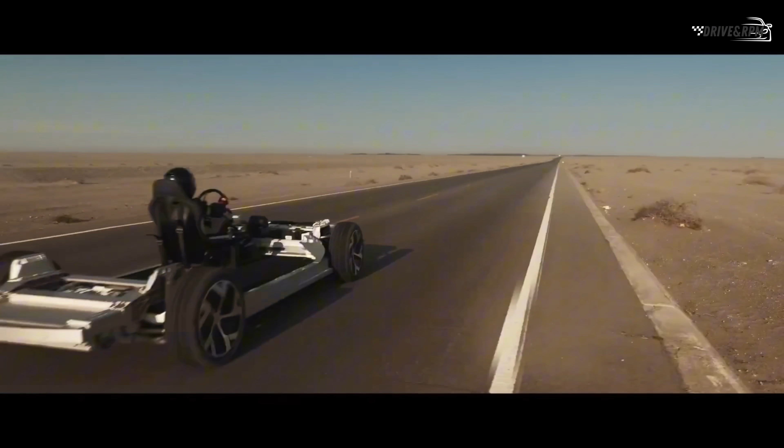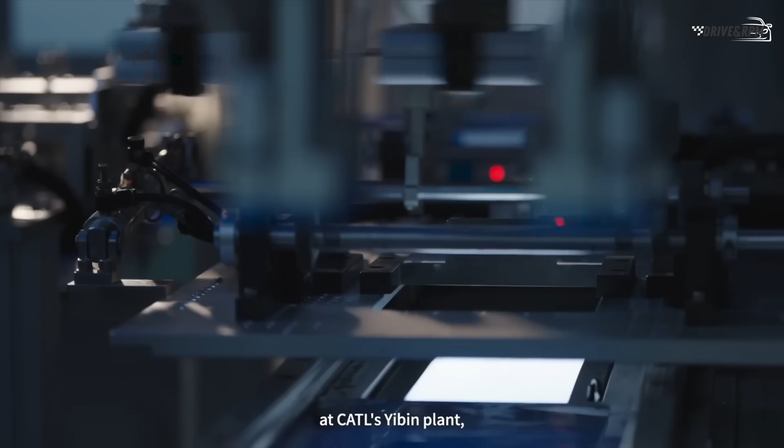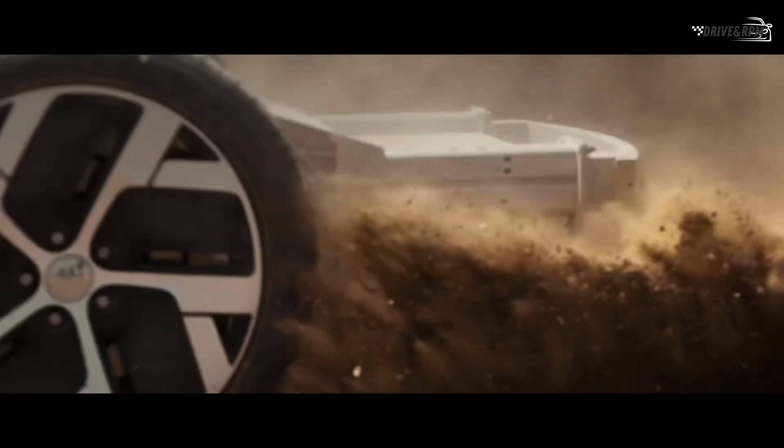If you have been browsing the automotive internet recently, you have probably been targeted by a headline that sounds like absolute science fiction. Automotive channels are screaming that CATL has allegedly built a miraculous battery with a staggering energy density of 12,000 watt-hours per kilogram, promising an unconditional 2,000-mile or 3,200-kilometer range on a single charge. They are telling you that gasoline is officially dead tomorrow.

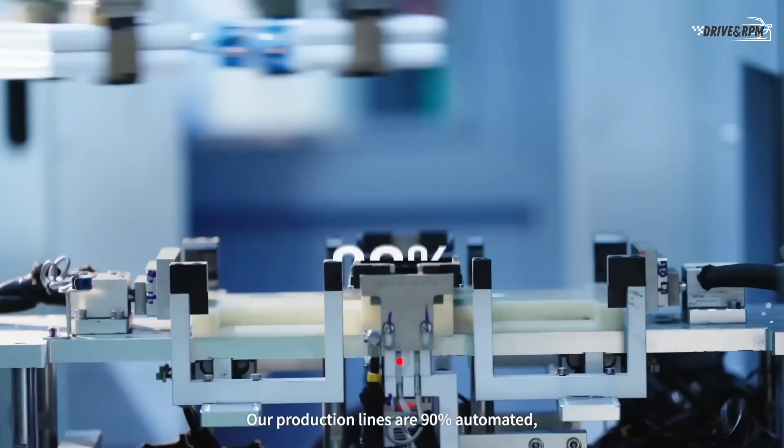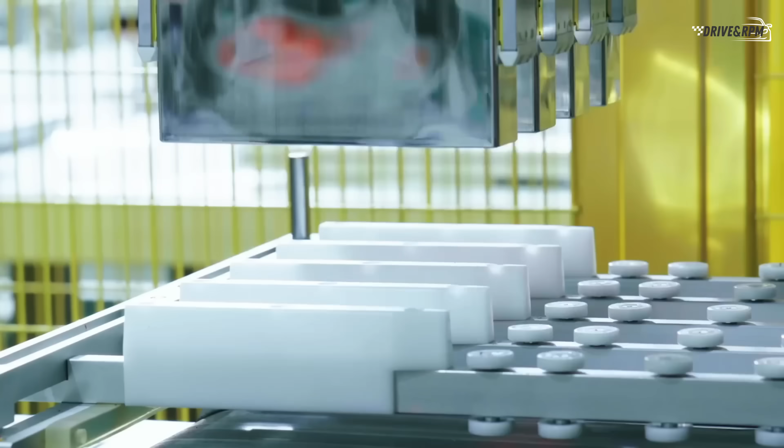But let's pause and look at the real reason why millions of drivers are clicking on those videos. It is not because people care about the complex mathematics of energy density. They click because of a deeply human emotion: exhaustion. As drivers, we are exhausted from range anxiety. We are tired of loading our families into the car for a winter holiday, only to watch our driving range instantly plummet by 30% just because we turned on the cabin heater. We are frustrated by broken highway chargers, freezing winter temperatures that paralyze battery chemistry, and the constant mental mathematics required just to take a simple cross-country trip.

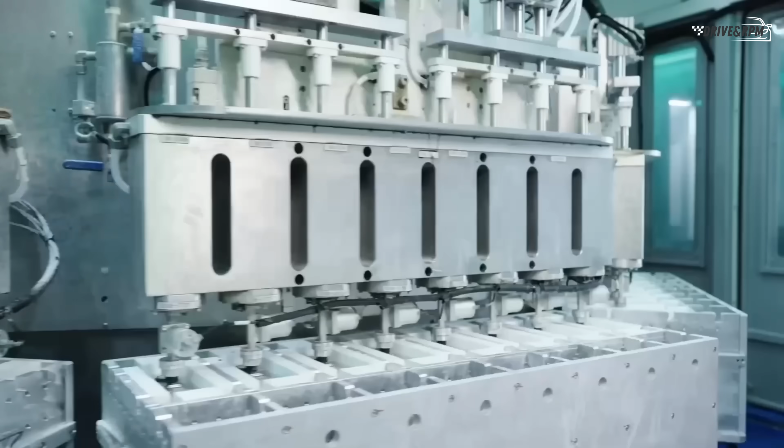The mainstream media knows you are craving true automotive freedom, so they package these numbers and sell you a clickbait dream. So, what actually happened behind closed doors?

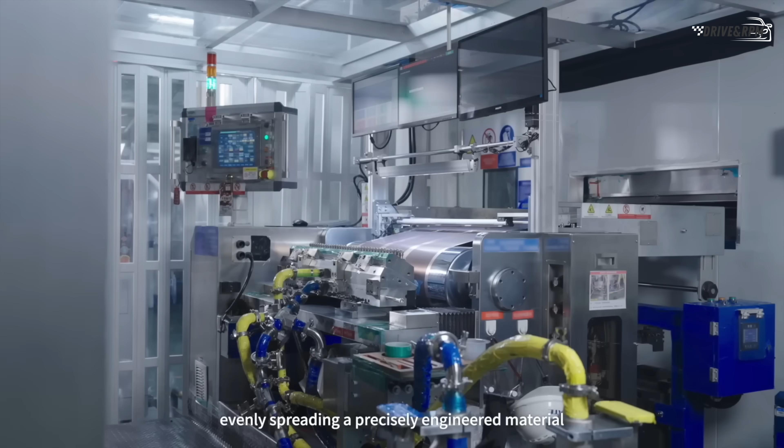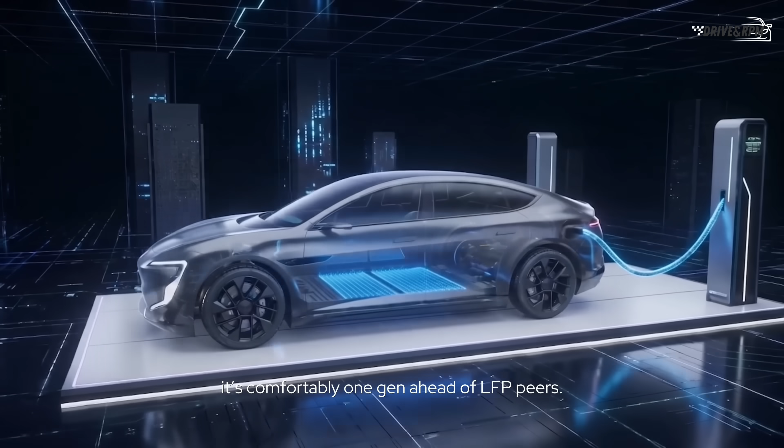A few days ago, at a major equipment and power forum, CATL's chief scientist, Wu Kai, stepped onto the stage and made a massive, industry-shaking announcement. He officially declared that CATL is weaponizing its vast research and development ecosystem to perfect lithium-air battery technology.

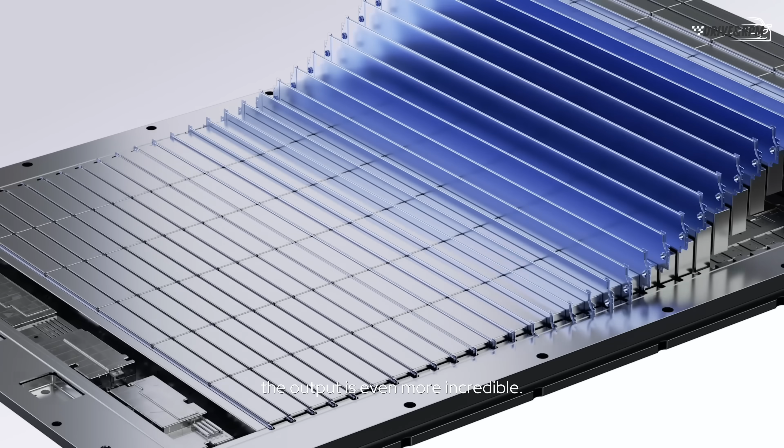But here is the absolute truth the internet intentionally missed. 12,000 watt-hours per kilogram is not the specification of a battery that CATL just rolled off a production line. It is the absolute theoretical limit allowed by the fundamental laws of physics. It is the ultimate scientific benchmark.

Today, we are going to strip away the sensationalist hype, expose the fake news, and look at the genuine forensic engineering behind what will become the ultimate cure for range anxiety: the breathable battery.

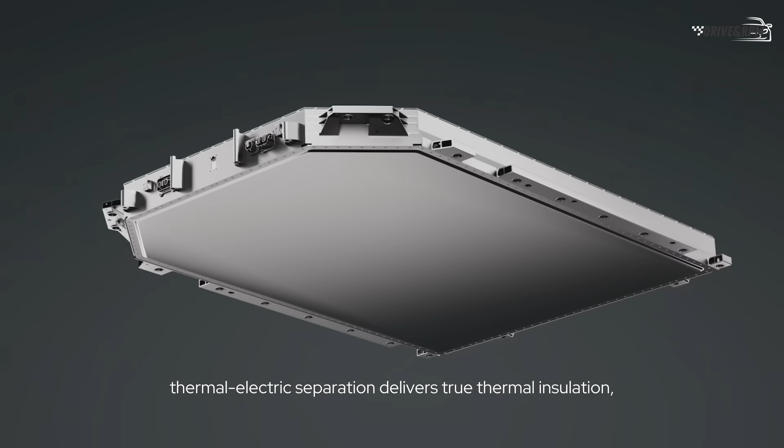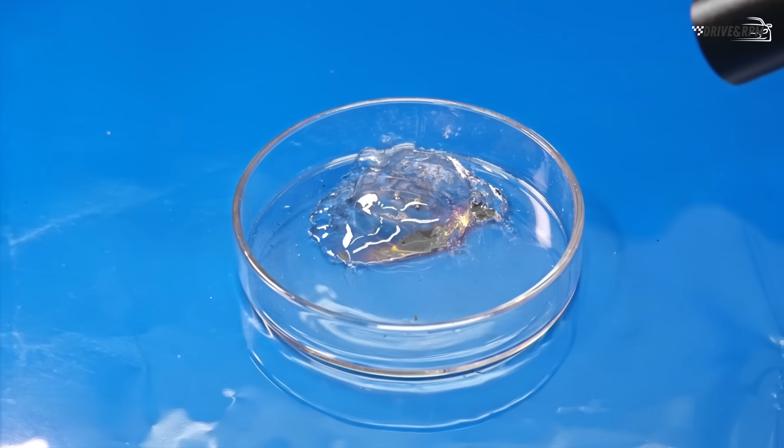To truly understand why the global engineering community is losing sleep over this announcement, we have to look at the massive physical compromise we are forcing drivers to accept today. Right now, the lithium-ion or LFP packs inside our modern cars are incredibly heavy, dense, and rigid. Why? Because they operate as self-contained chemical prisons.

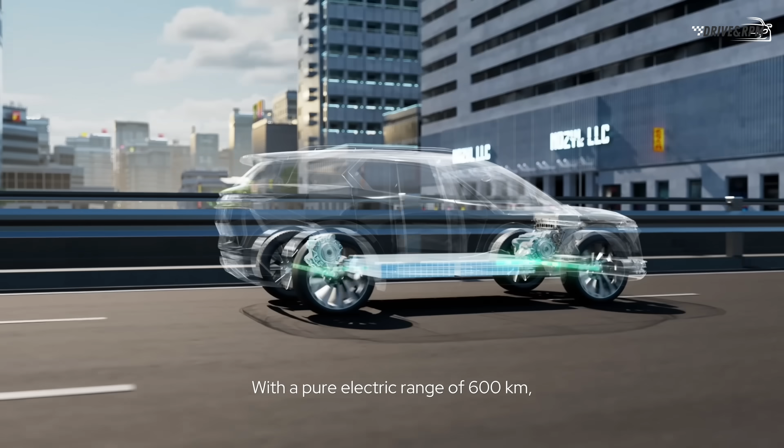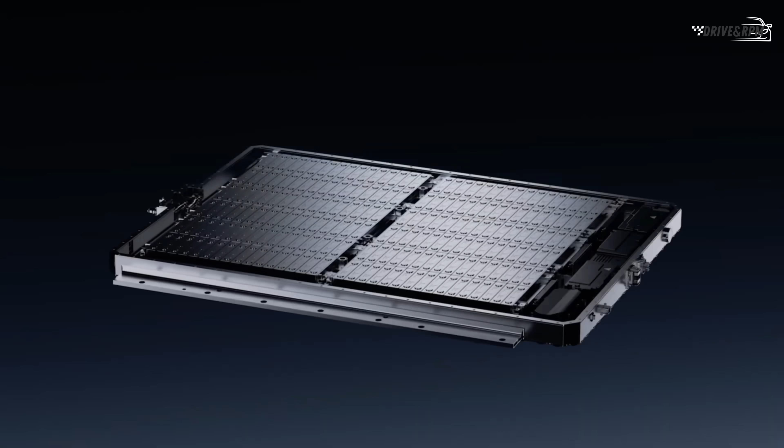They must carry every single active material required for the chemical reaction sealed inside a heavy, armored casing. Specifically, they use incredibly heavy metal cathodes packed with materials like nickel, manganese, or cobalt. When you drive a modern electric SUV, you are essentially driving a mobile bank vault. You are dragging around hundreds of kilograms of dead weight.

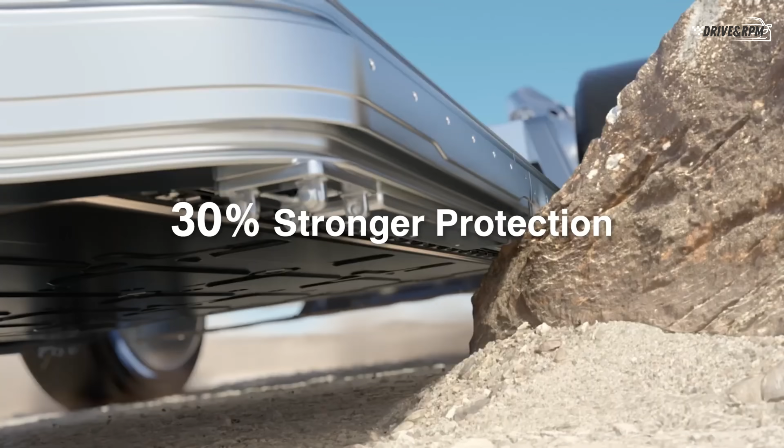This doesn't just hurt the handling and ruin the driving emotion. It destroys efficiency, and it severely accelerates wear and tear. A heavy EV chews through expensive tires at an alarming rate because the rubber is fighting a constant, losing battle against sheer mass. Lithium-air technology completely rewrites the rules of physics, and it does so by mimicking something beautifully organic: breathing.

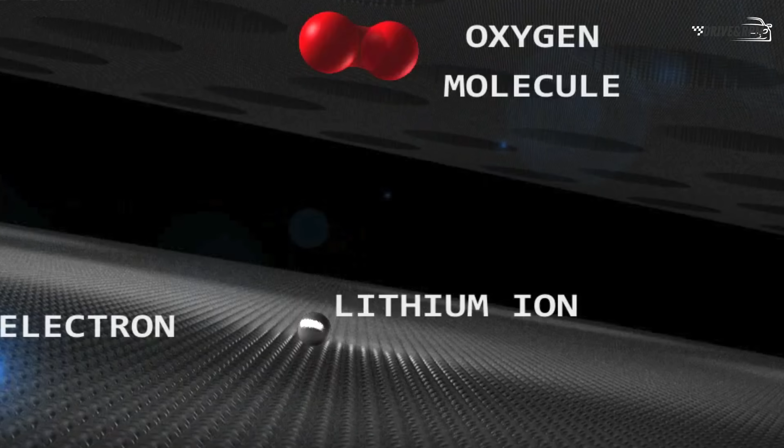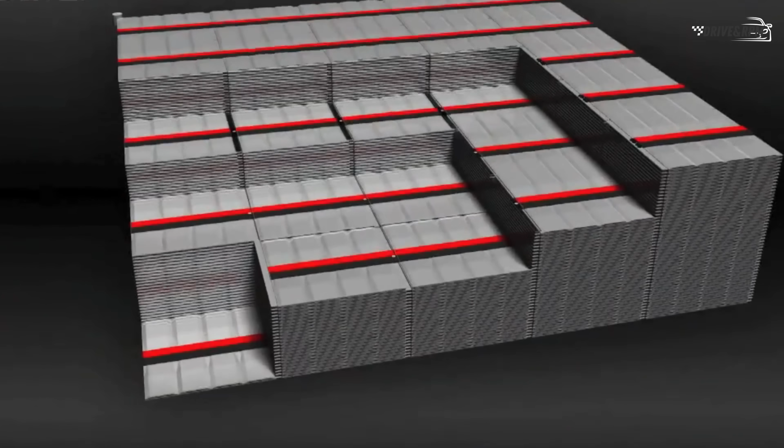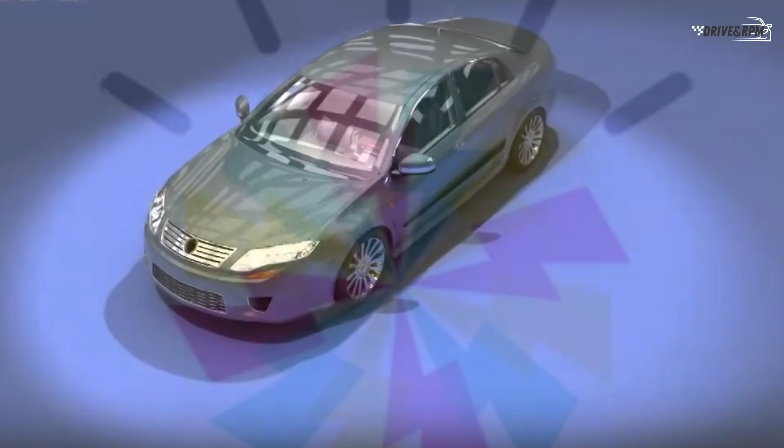It is nicknamed the breathable battery because of its open, porous structure. Instead of carrying a heavy internal cathode filled with dead, expensive metals, a lithium-air battery relies on the environment. When you put your foot on the accelerator, the car literally inhales ambient oxygen from the outside air. This oxygen flows through a highly advanced microscopic membrane and reacts directly with a lithium metal anode to generate pure electricity.

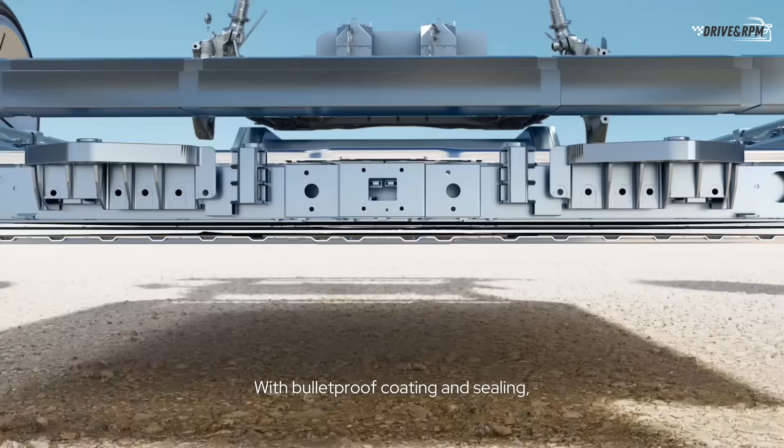When you plug the vehicle in to recharge, the chemical process reverses, and the oxygen is simply exhaled back out into the atmosphere. By utilizing the oxygen in the air around us, engineers can eliminate the heaviest components of a traditional battery pack entirely.

It brings back the fundamental brilliance of a traditional internal combustion engine. An engine doesn't carry a heavy tank of oxygen in the boot. It breathes the atmosphere, and soon, your electric car will do exactly the same.

So, if the physics of a breathing car are so perfect, why is this announcement only happening now? Traditional legacy automakers in the West desperately want you to believe this is just a distant laboratory experiment. They want you to think this is a wild conspiracy theory that won't affect the market for another 20 or 30 years. They push this narrative because they are absolutely terrified of how fast the landscape is changing beneath their feet.

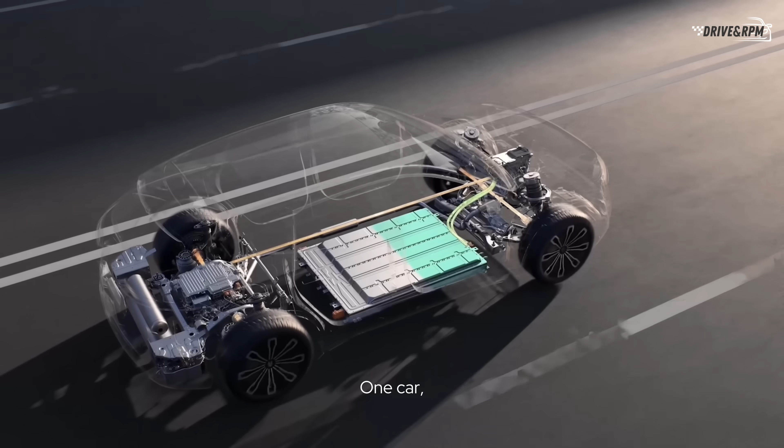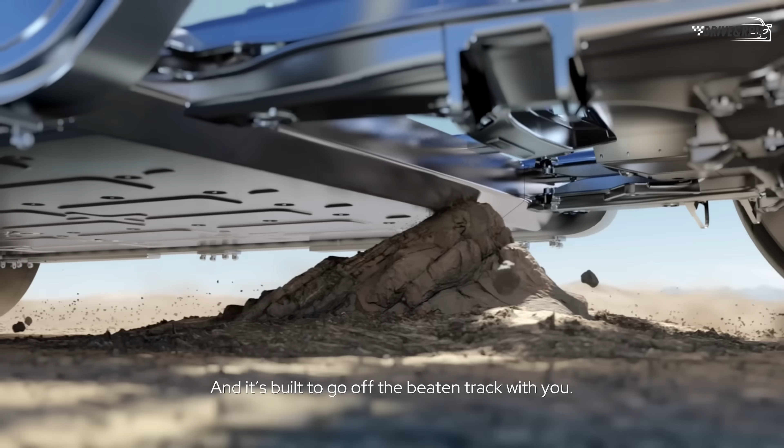While the theoretical limit of the chemistry is 12,000 watt-hours per kilogram, which remarkably matches the exact energy density of crude petrol, working, highly advanced prototypes are already breaking records at around 1,200 watt-hours per kilogram in testing environments. Let's put that into perspective for the everyday driver.

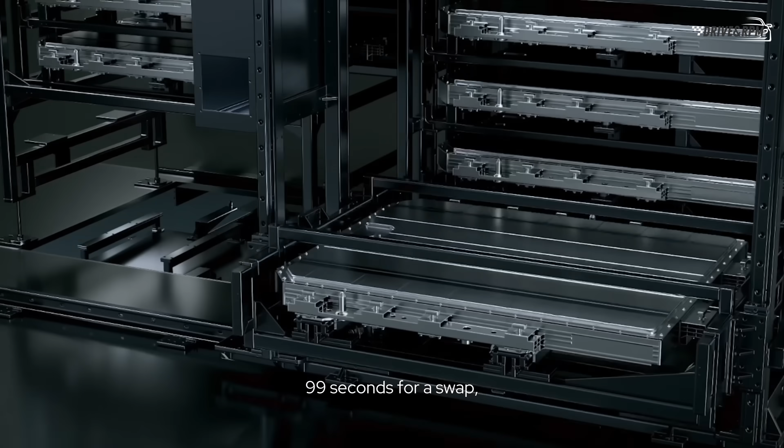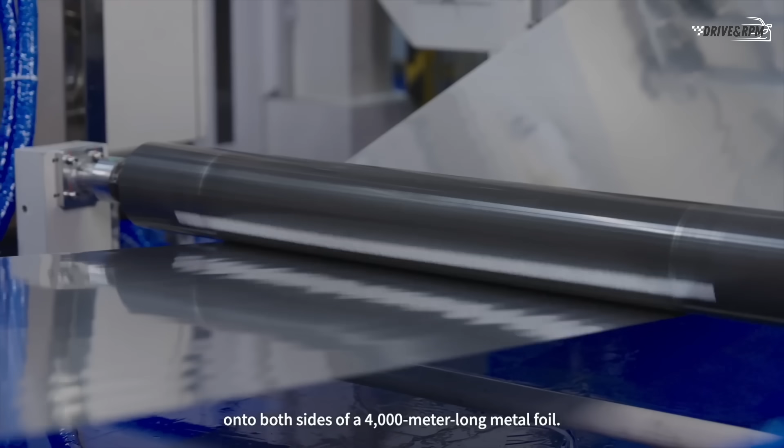The absolute best batteries inside premium electric vehicles right now only hover around 250 to 300 watt-hours per kilogram. This next-generation technology is already 4 to 5 times more powerful than anything currently on the road. However, the final engineering hurdle isn't about energy capacity. It is about chemical stability and protecting the driver's investment.

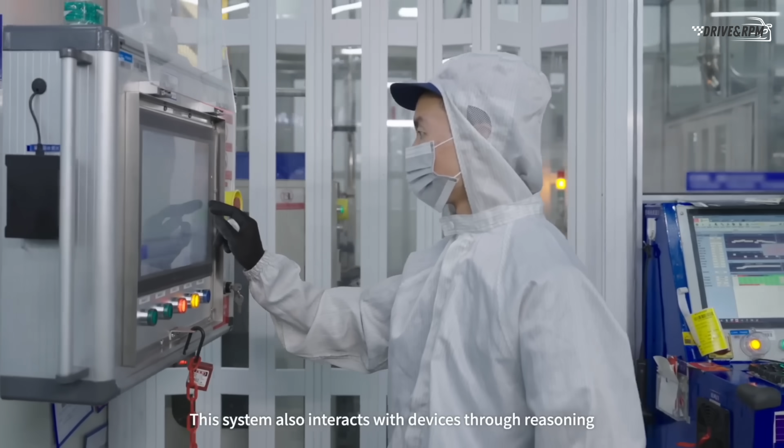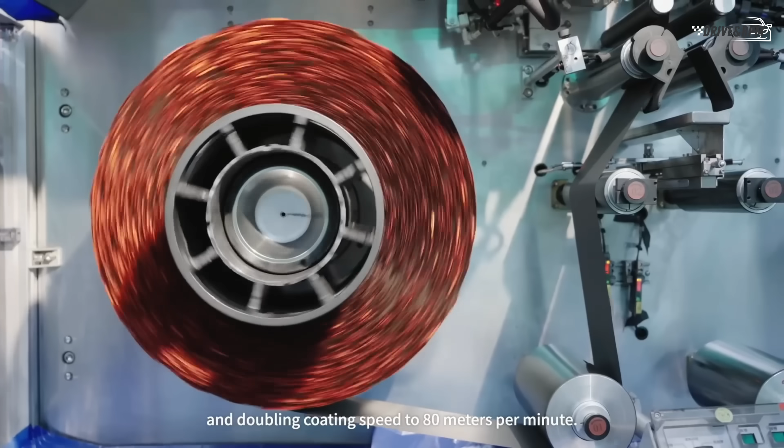Because the battery breathes atmospheric air, it also inhales moisture, carbon dioxide, and urban pollution. These elements cause parasitic reactions. They create microscopic crystal structures called dendrites that grow inside the cell, eventually piercing the membrane and short-circuiting the battery entirely. The challenge CATL is aggressively solving right now is miniaturizing an advanced filtration system to block this moisture and purify the air before it touches the lithium core. This is vital to ensure the battery outlasts the life of the car itself.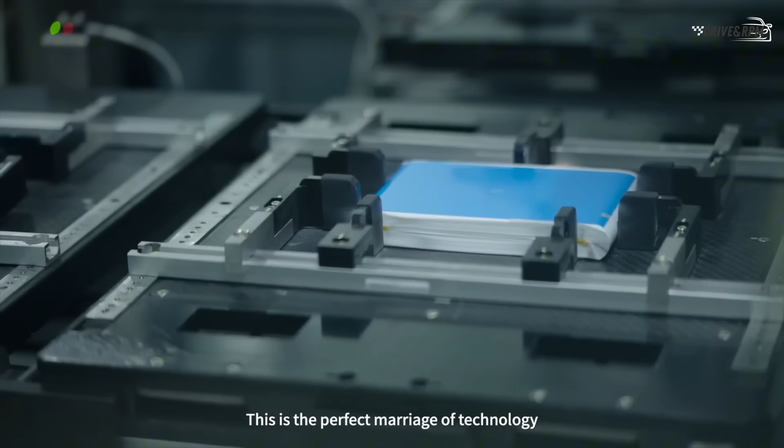Legacy brands are comforting themselves by assuming this filtration technology will take a decade to mature, but they are completely blindsided. CATL isn't just researching this on paper. They have activated their entire financial empire to accelerate this into mass production, aiming to deploy it much faster than the West can even reverse engineer the blueprints.

Let's step away from the abstract chemical equations and microscopic membranes for a moment. Let's look at what this actually means for the person sitting behind the steering wheel. This is where the human element of forensic engineering changes the entire automotive experience.

The electric vehicles of today, while incredibly fast in a straight line, have lost a bit of their mechanical soul. Because they easily weigh over 2.5 tons, they require stiffer, harsher suspensions just to stay level in a corner. They require massive, expensive brakes.

Think about a sudden emergency stop on a wet, freezing motorway with your family inside. The laws of physics cannot be cheated. Stopping a 2.5-ton block of metal is a terrifying prospect that relies heavily on electronic intervention.

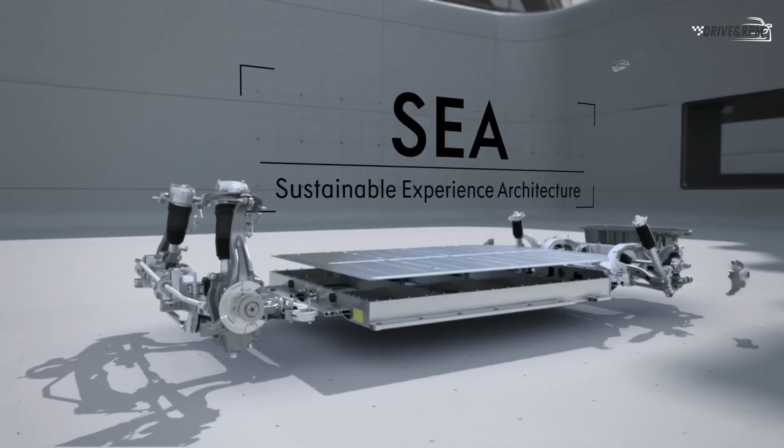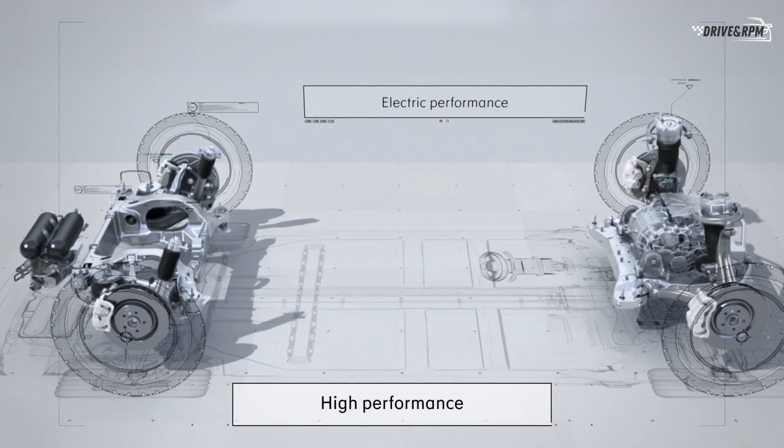Now, imagine a future vehicle built on an integrated cell-to-chassis architecture using a refined lithium-air pack. Because the battery is fundamentally hollowed out and incredibly light, the entire vehicle sheds hundreds of kilograms of mass. For the driver, this means a total renaissance of vehicle dynamics. It means sports cars and family SUVs will finally feel agile, organic, and deeply connected to the tarmac, rather than feeling like heavy rolling appliances.

The ride quality will become softer without rolling in corners. Tire replacement costs will plummet. The braking distances will become drastically shorter, and the safety of your passengers will increase exponentially.

The transition to this breathless, infinite range future isn't happening in a vacuum. It is being actively engineered in plain sight right now. Advanced Asian manufacturing platforms are already serving as the structural test beds for this exact evolutionary leap. If we look closely at the vehicle architecture of mega manufacturers like Changan and premium tech partnerships like Zeekr and Avatr, we see the real story unfolding.

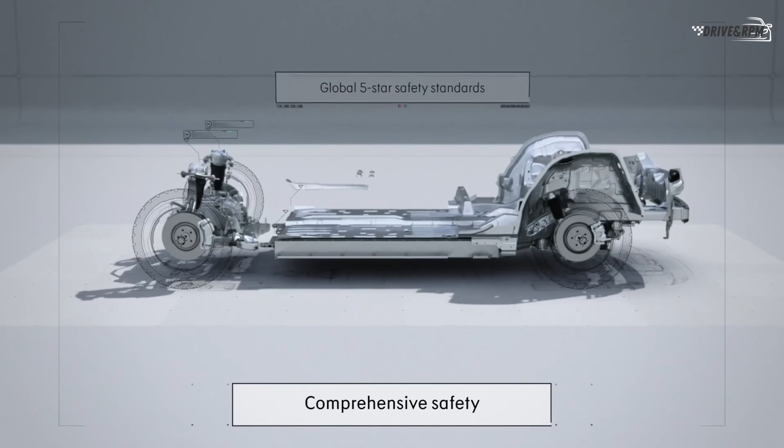Their current high-end vehicles are not just random electric cars. They are highly advanced, modular laboratories on wheels. Their hyper-rigid, Giga-cast aluminum chassis and sophisticated structural engineering are already structurally optimized to house these ultra-lightweight lithium-air packs the exact moment they leave CATL's pilot production lines. They are building the foundations today for the batteries of tomorrow.

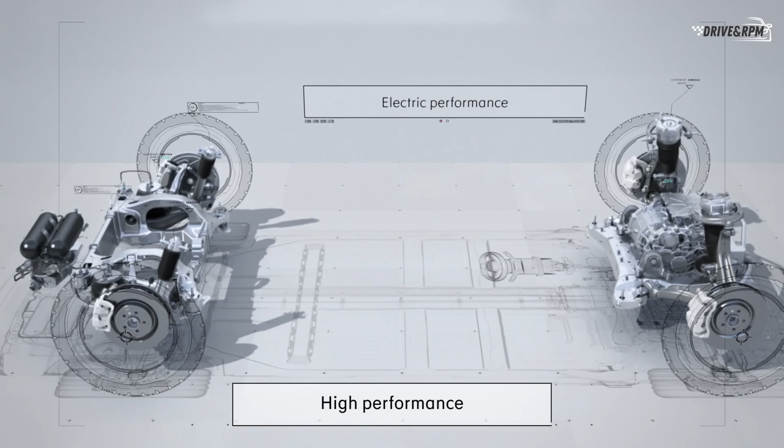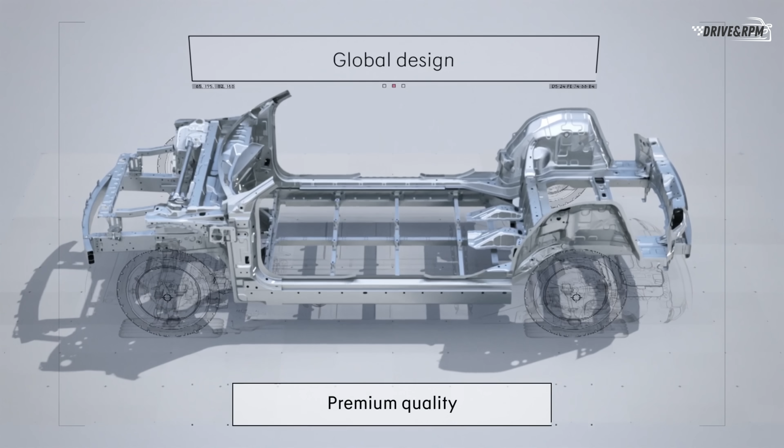The sensationalist channels on YouTube might misinterpret the physics of the 12,000 watt-hour limit to harvest your clicks, selling you a lie about 3,200-kilometer cars arriving tomorrow morning. But the unfiltered truth is far more dangerous for the established automotive order. The heavily compromised electric vehicle we drive today is just a temporary stepping stone.

A quiet, terrifyingly rapid manufacturing blitz is taking place right now to secure the ultimate endgame of propulsion. The lightweight, infinite range, breathable future is arriving at a velocity the rest of the world is simply not prepared to handle.